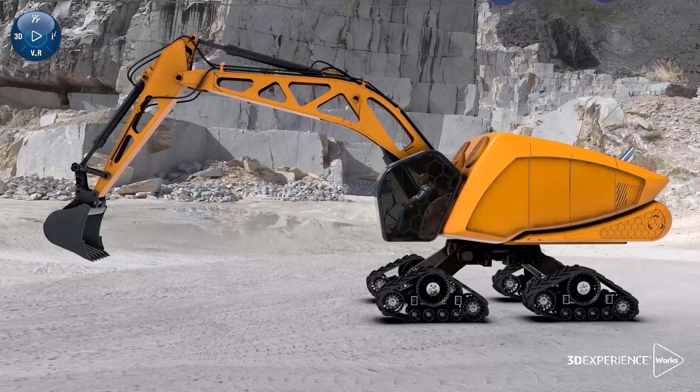My name is Christine Chambers, and I'm an engineering manager at EMCA. Our BEE excavator has been on the market for a couple of years, and we have initiated an update effort to be more competitive. Our business development team has collected feedback from customers, and the engineering team has derived 5 improvements based on this feedback.

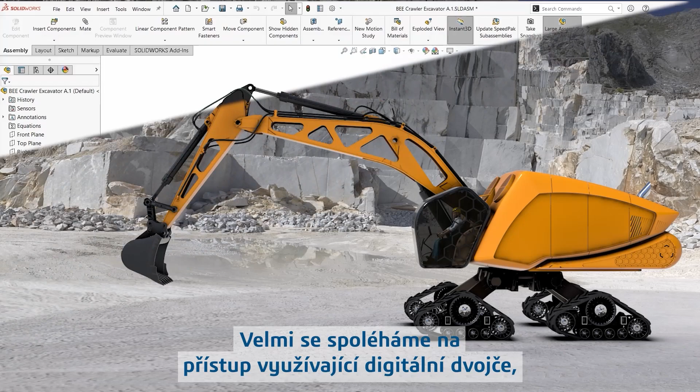Let me walk you through the MODSIM approach taken at EMCA, in which modeling and simulation are integrated to efficiently and rapidly engineer these improvements on our BEE excavator. EMCA uses the 3DEXPERIENCE SOLIDWORKS as a CAD system, and we connect to the 3DEXPERIENCE platform for our project management and simulations on the cloud. We rely heavily on the digital twin approach to develop our products and improve them.

Besides me, our team is comprised of 3 engineers located in different offices worldwide and 1 supplier. Sung-Ho Min is our mechanical design engineer working from our Seoul office in Korea. He was tasked to tackle boom modifications to increase load capacity and the redesign of our rollover protection bars to meet new safety regulations. Dipali Rajni is our HVAC engineer based in our Bengaluru office in India.

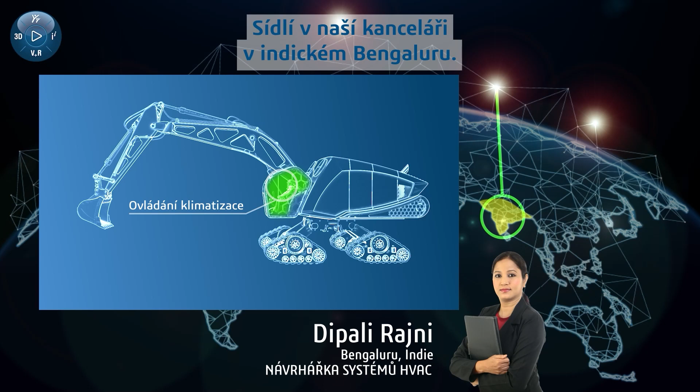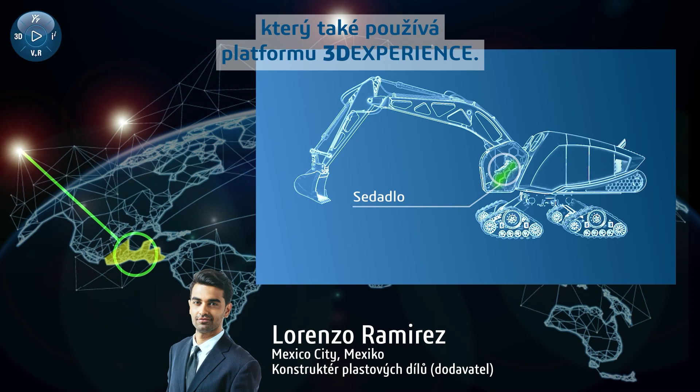She is responsible for redesigning the HVAC system and validating the cooling efficiency and operator thermal comfort to address some customers' complaints. The design of the new operator seat was given to one of our suppliers in Mexico that also used 3DEXPERIENCE. Lorenzo Ramirez is a plastic part designer collaborating with us to redesign the operator seat. Our last teammate is Ilda Fiore, who is an electromagnetics engineer from our Turin office in Italy. She was asked to identify the optimal location for the placement of an antenna for a new intelligent operation system.

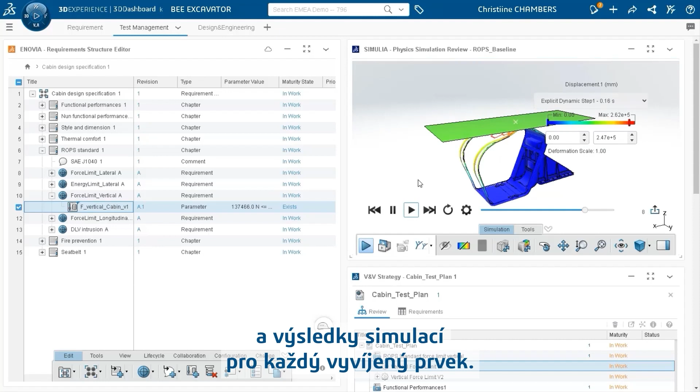This project was entirely managed through 3DEXPERIENCE. All stakeholders were connected to the 3DEXPERIENCE platform through a collaborative space with controlled data access. This allowed everyone to collaborate, communicate, and share results. As the project manager, I created a dashboard that included the requirements and KPIs for every element to know when the development targets will be met. The dashboard also shows the latest proposed geometries and the simulation results for each element in development. Such a dashboard improves communication inside the team and provides rapidly the status of the project.

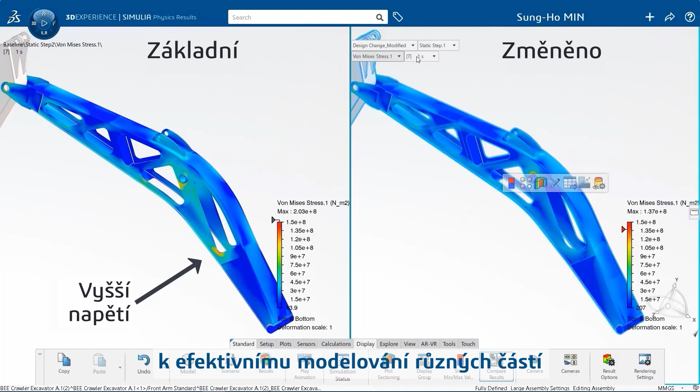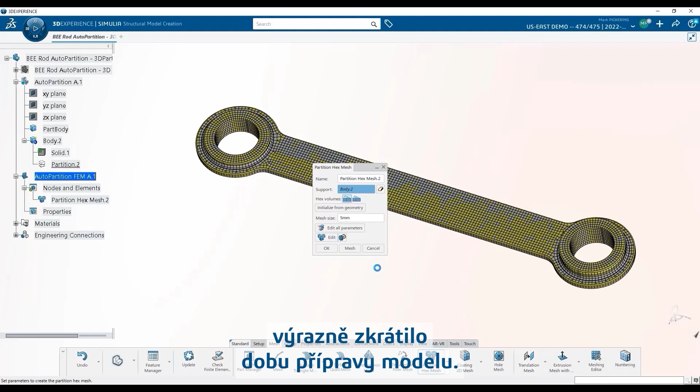Let's look in more detail at the improvements we worked on. For the boom, we targeted an increase of load capacity. Sung-Ho was able to leverage a broad suite of element types to efficiently model the different parts and reduce the structural simulation turnaround time. For the durability study of the side link, we used test data to model the high and low cycle loading of the link. We leveraged the strain-based fatigue approach for high-fidelity results enabled by fe-safe solver technology. The auto-partitioning for solid hex meshing reduced model preparation time significantly. The results were shared in our project dashboard, and the new thickness was identified within a few iterations.

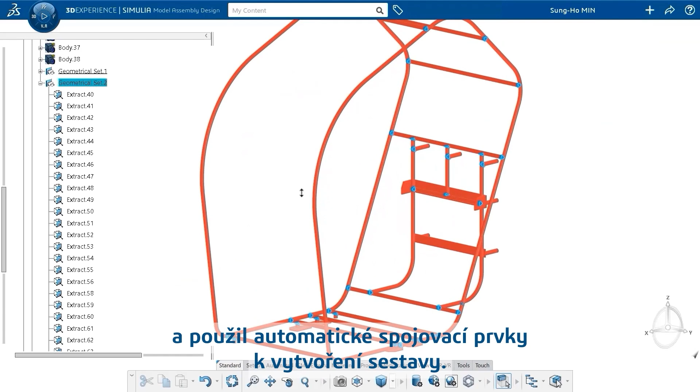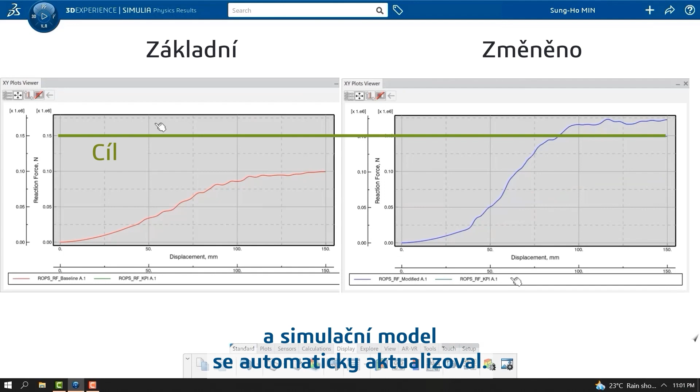New regulations mandate the rollover cage be able to sustain a higher peak reaction force. Sung-Ho leveraged the beam meshing capabilities to discretize the rods efficiently, and used automatic line fasteners to make the assembly. The Abaqus solver-based explicit analysis was used to prescribe a fixed displacement to the top of the cage, and the corresponding reaction forces were computed. The rod dimensions were modified in SOLIDWORKS, and the simulation model was updated automatically. The results were compared to finalize the design changes.

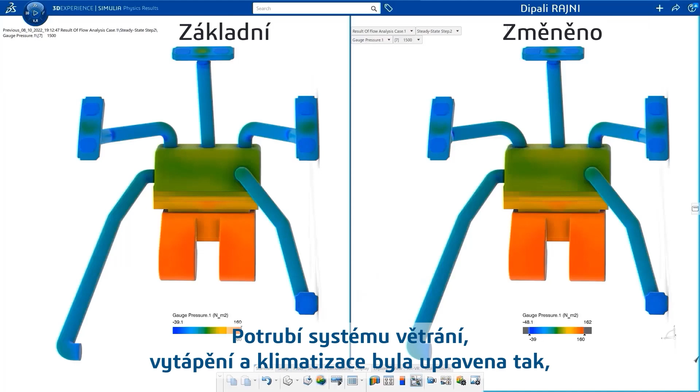On very hot sunny days, the cabin took a long time to cool down with the AC turned on. Dipali evaluated the airflow distribution across the HVAC registers and the uniformity of the air velocity coming out of each register. The HVAC ducts were modified to minimize pressure drop, ensure uniform flow distributed to the cabin, and maximize flow uniformity at the exits. Dipali performed a parametric design study to assess the HVAC performance across various blower speeds. I was able to see the overall improvement in HVAC efficiency on the project dashboard.

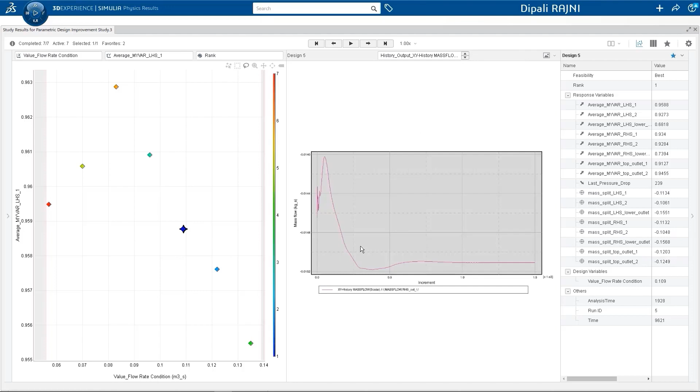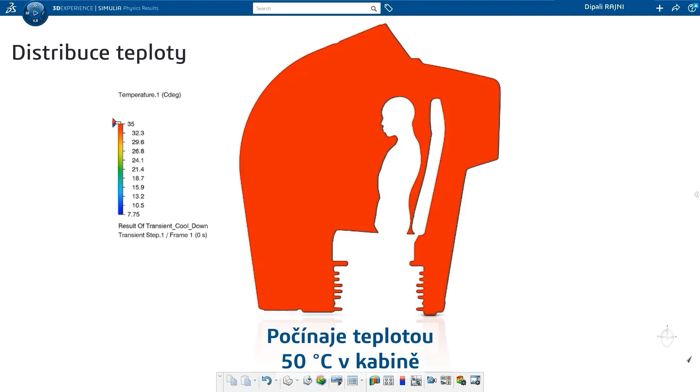The results from the HVAC redesign were used as input to assess the cabin cooldown time during a hot sunny day. Starting from a 50°C cabin temperature, a transient conjugate heat transfer simulation was performed to evaluate time to reach the average temperature of 24°C surrounding the operator.

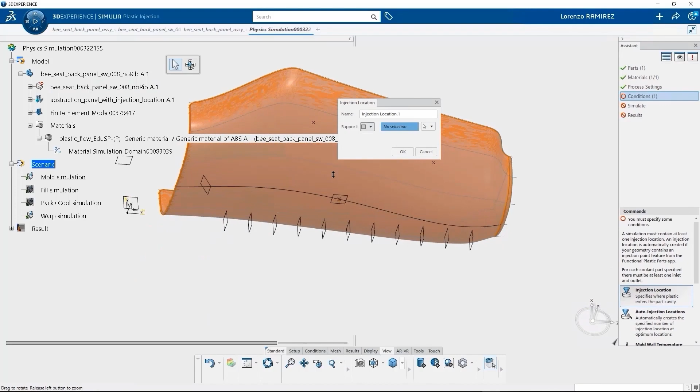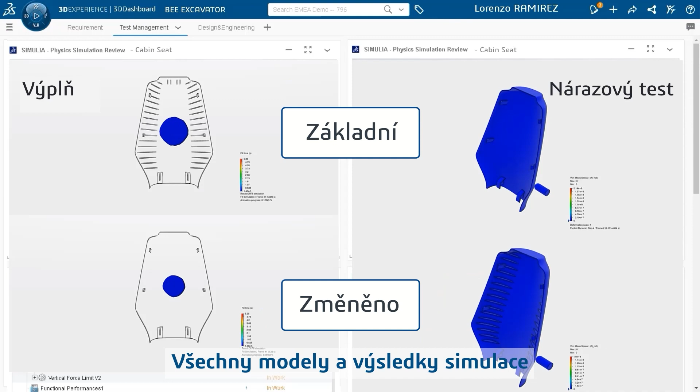The operator seat was designed by our supplier Ramco in Mexico. The back of the seat is made of a plastic cover that needs to resist physical shocks experienced while operating the excavator. Based on the injection molding simulations, Lorenzo at Ramco was able to see the quality of the plastic injection process, the cycle time, the warpage and shrinkage experienced by the plastic cover. Lorenzo added ribs inside the cover in SOLIDWORKS to increase its rigidity and meet the requirements. All the models and simulation results were shared with us in the collaborative space on the project dashboard.

The intelligent operating system requires an antenna to locate the excavator operating on site. The intensity of the electromagnetic field in different directions is our main indicator here. To study this, Ilda used the electromagnetics engineer role on the 3DEXPERIENCE platform to simulate the intensity of the electromagnetic field for the selected antenna in any given direction and identify any potential problem.

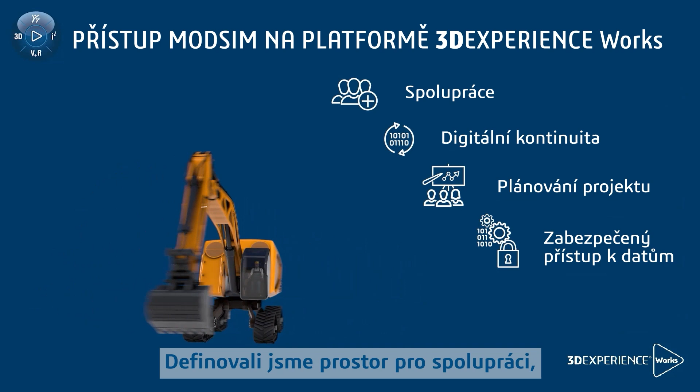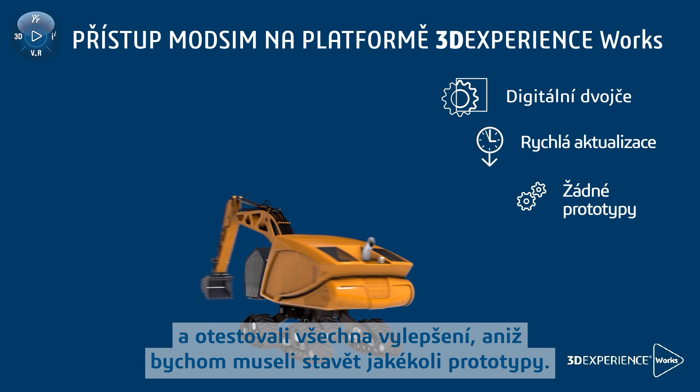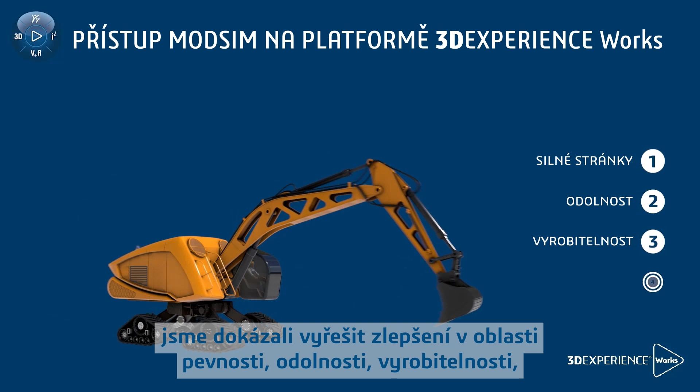In summary, in this excavator upgrade project, we fully leveraged the 3DEXPERIENCE Works portfolio to meet all the requirements defined at the beginning of the project. We defined a collaborative space that allowed everyone, even the supplier, to work on controlled access data. We quickly updated the excavator's digital twin and tested all improvements without having to build any prototypes. The MODSIM approach enabled by the 3DEXPERIENCE cloud platform allowed us to tackle improvements in strength, durability, manufacturability, thermal comfort, and electromagnetic efficiency. It helped us meet our targets in a timely manner while reducing prototyping costs and ensuring enhanced product quality.